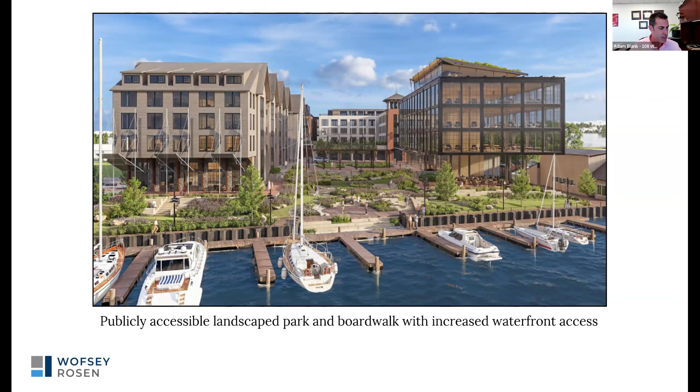And again, as I know you've done lots of these, I just want to take maybe 2 or 3 minutes quickly running through. Obviously, the purpose of us being here tonight is asking for you to hopefully make a determination for consistency with the harbor management plan. I'll show you really quick—we do believe it's consistent with the harbor management plan.

We are including a water dependent use, and we have agreed with the planning and zoning staff that we will make sure it's clear in the labeling that it will be what you sometimes refer to as truly a water dependent use versus not such a water dependent use, but classified as a water dependent use for a portion of the site.

That's in addition to the new boat slips, in addition to the improvement in water quality based on the improvements you'll hear from Vince Hines in just a minute. We're creating public access to the waterfront, and we're promoting sustainable economic growth on an underutilized site and enhancing public appreciation for Norwalk's coastal resources. Those are all in your management plan. And again, maintain and enhance opportunities for recreational boating and boating related uses—we're going to be creating that with the boat slips.

Opportunities for non-boating recreational use of the harbor and the waterfront, right in the plan: walking, bicycling, picnicking, nature observation, land-based fishing, enjoyment of water views, and special public events on the waterfront sites. I think we're going to accomplish all of that with this application.

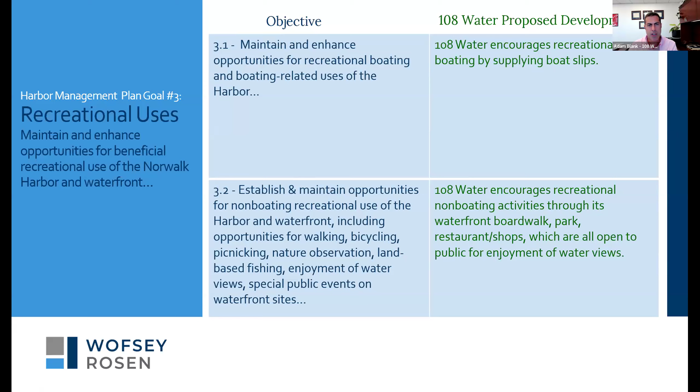We're committed to a truly water dependent use on a portion of the site that Seelan will show. Your plan asks for supporting continuing operation of non-boating water dependent facilities and areas, including waterfront, park, and beach areas, which we're creating. You'll hear the boardwalk we're proposing includes a grand staircase so the public can walk down directly and touch the water.

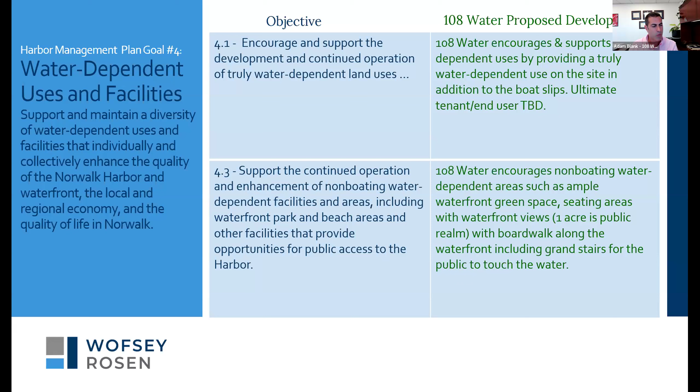Impacts of flooding and erosion control - I'm not the expert on that, but you'll hear that compared to what's there now, we're going to make it significantly better. We're not going to solve all the issues on Water Street, but we think we can make some improvements, and you'll hear about that.

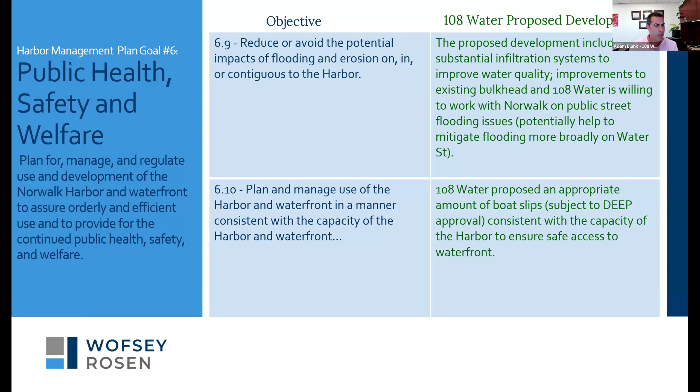Again, plan and manage use of the harbor and waterfront consistent with the capacity of the harbor and waterfront. We want to put in as many boat slips as will be permitted through DEEP. We're promoting substantial economic growth and community development. Some of the boat slips will be available for transient boaters, restaurant, public use, and some will be reserved. We think with this site we're going to really encourage economic activity, recreational and tourism.

Again, we're improving existing conditions. There's no existing water access areas for public use - we're creating that. We're creating new water access areas for public enjoyment of the harbor, and with the public realm and green space, we think we can hold some harbor related events and provide recreational opportunities there at the site. None of that exists currently.

So we believe - and I don't expect you to agree with me at this point because you haven't heard from the rest of the team yet - but I'm hoping that by the end of the presentations you'll think back to those items we've listed and find that we are in fact compliant, or consistent, with the harbor management plan.

With that introduction, absent an immediate question for me, I'd like to turn it over to the architect, Seelan Pather.

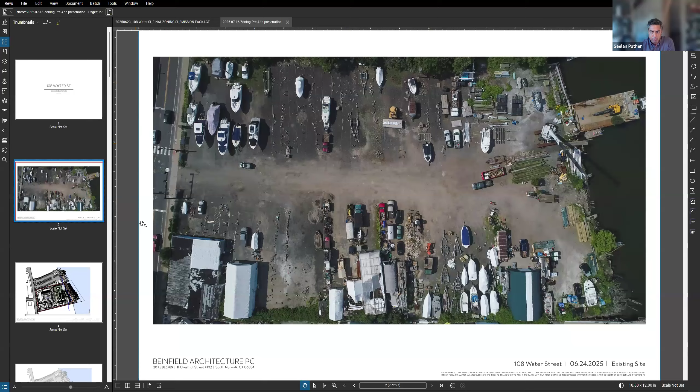I know you probably want to hear more about the site from Vince than me, but I'll go over the big picture concepts we tried to achieve here. Start with this - this is the site, what Adam brought up before. One of the things that struck us when we wanted to create this truly mixed-use development is that we wanted to create a permeability through the site that doesn't exist today. It's very much private now.

Here's our site plan, and this is what we're calling our connectivity plan. It's a truly mixed-use development - it's got residential, 59 residential units, 2 office buildings here and here, you'll see it more in detail when I go through it. It's going to have a restaurant, retail type uses at the front on Water Street, and then this water dependent use that we've been speaking about.

From the beginning we worked with the developer to create the idea that the site was permeable, that people could use the waterfront side of it so that it actually activated the entire site. That was a fundamental concept from the beginning - that we had to activate the site from the street to the water for it to be a successful development.

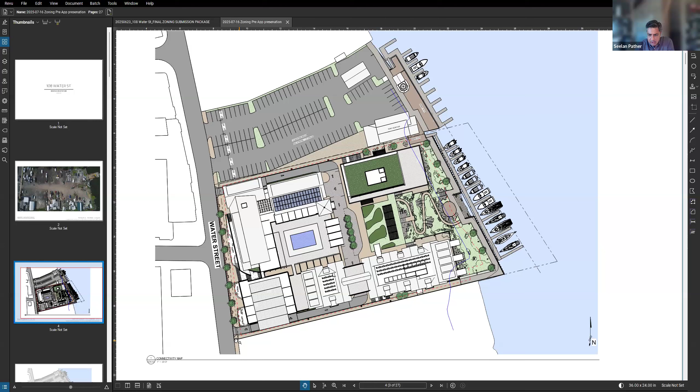So with that, the 2 edges of the site have walkways going all the way from Water Street to the water. Now these are flat - you'll see in the renderings that the actual development will take you up above the flood elevation and then back down to the water, but these 2 edges are flat. So walking along Water Street, you can literally turn right, or turn left if walking this way, and walk on a flat surface to get to the water.

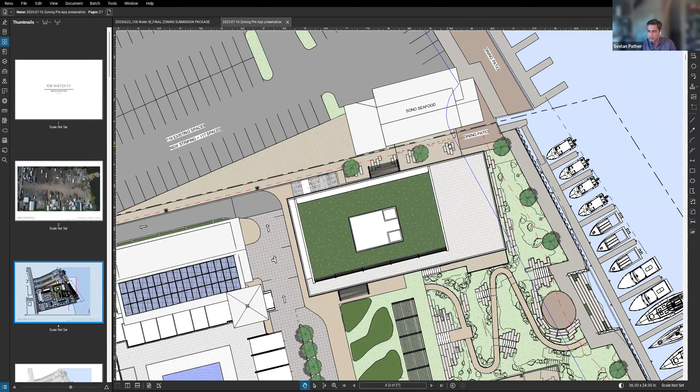When you get to the edge, this is a boardwalk consistent with the city's goal of having a connected boardwalk. We're doing our part, we think. We're creating a boardwalk that fronts our entire site and hopefully connects in front of the Sono Seafood restaurant right here, and we're still working on that. What this diagram also shows is this opportunity to widen the path if we can figure that out with this adjacent site, and really have a curated edge here that people could sit along and have different experiences as they get to the water. So that's the two edges.

I'm going to jump ahead here, I'll come back. That's the two edges. But what we see as our grand gesture is this grand set of stairs that come off Water Street here, invite you into the site. Again, anyone, it's a public space, through the site, up, over, and to a raised platform, if you will. I'll show you that better in the renderings.

And again, all accessible by the public. You go into the two office buildings if you work there. It's ADA accessible, and there's an ADA route via an elevator here. Then you can go to the leasing. This is the heart of the project. You go to the leasing offices or to the residential in this area. But someone from the public can literally come up here, come up to this area, and then walk down by the serpentine route to the water. So all of this, we hope, is a very pleasant experience for pedestrians coming up through the site and down to the water.

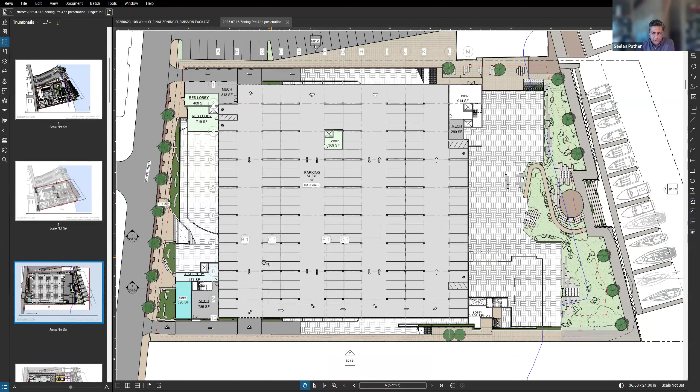Go back. So just to explain, there's a series of two parking garages at two levels. There's two lobbies here that meet the street at street level. You know that's in the flood, that's where the whole of Water Street meets. You have to enter at below flood elevation, but these two lobbies take you up above the flood elevation. There's parking at elevation 9, and then you get to these levels that are above flood at 14, two above flood by regulation. We are outside the VE zone, that's that blue line here for all of our building, and so we're above the flood elevation of 12.

And once you get above that lower level, you have a higher level with a residential amenity, one level higher than this roof deck here, and I'll show you that in the renderings. So all in all, a series of elevations with a series of different amenities for different users on the site.

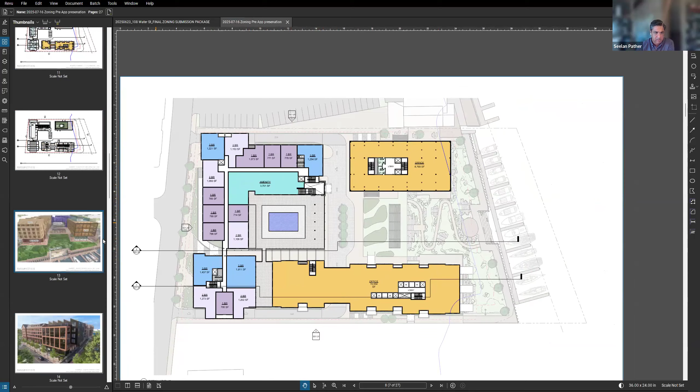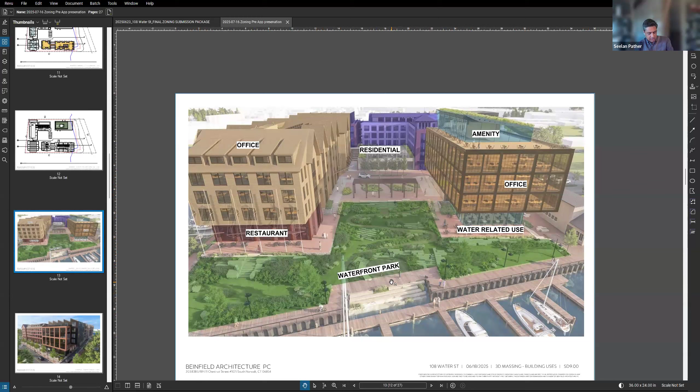I'm going to jump straight to the renderings, unless you want to go to the plans. I'll go through anything you want. But this diagram essentially shows residential at the back. Here's Water Street behind the purple. Here's your boardwalk in the front. Here's your office, here's your office here, and here's this entirely public—I don't want to say park, but landscape area—that you go up from elevation 18 all the way down to about elevation 7 at the water.

This is what it looks like from Water Street. Here's your grand stair entry here, here's your flat walkway on either side, here's that walkway coming down all around, here's that boardwalk going across, with the aspirational goal to connect this to the Sono Seafood and beyond, hopefully at some point.

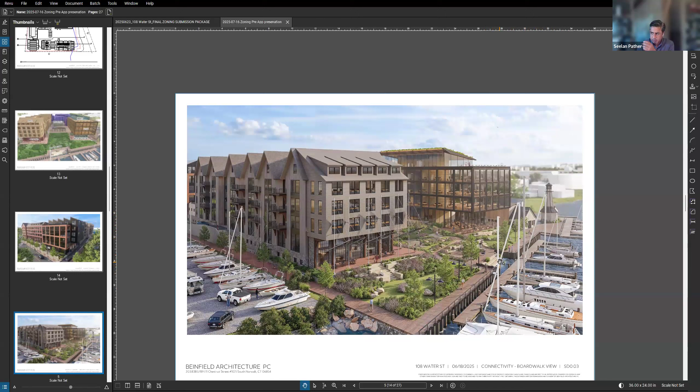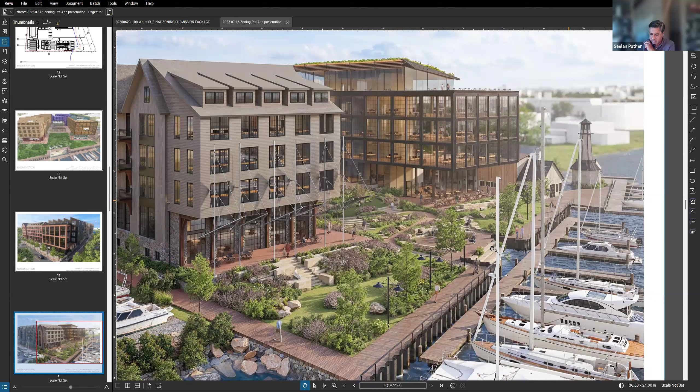It's one of the few places that you can actually touch the water in Norwalk. I walk down to Oyster Shell Park most days, and there's one location outside the Maritime Aquarium, and another one at the actual park, and this will be another one where you can come down from a high elevation from a restaurant here, and there's a water-dependent use right here. It has pride of place in front of the docks, and you can sit here or sit down here and touch the water.

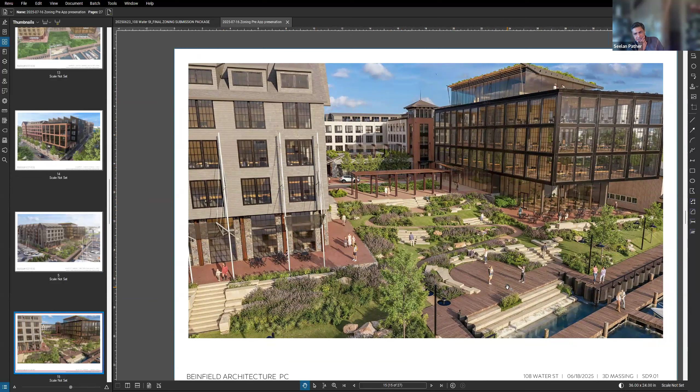And this is my favorite image, showing the type of place we're trying to create. Really, we have two office uses, a residential use that spills out, a restaurant use that spills out, and a water-dependent use that spills out. We should hopefully create one of the better public spaces in Norwalk, if we get it right, and we intend to.

This shows how the site gently slopes up to the high elevations at the back, and then, like I said, there's stairs that take you back down to Water Street on the other side of this. And Adam, I think that's enough for the flavor of it, no? Unless you want me to get into anything else.

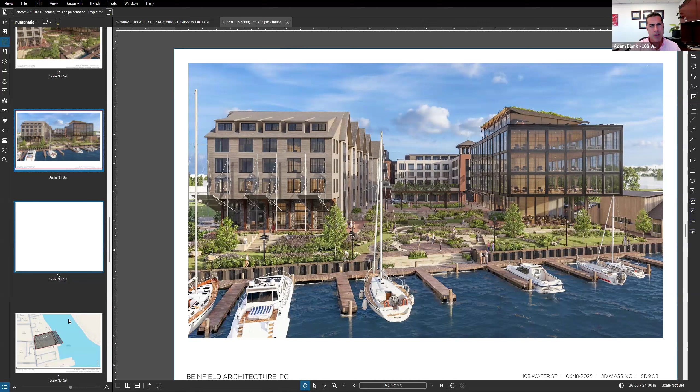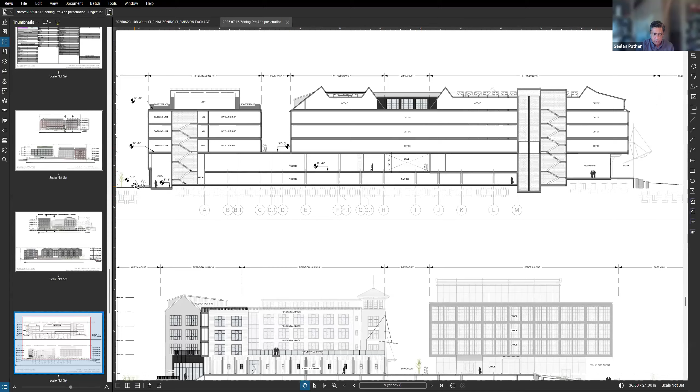I think that works. Just to point out that parking at the lowest level is above street level, so we're not going down, we're going up, even at the lowest level of the parking. Here's the grade of Water Street, here's the water, and you can see we're not going down below those elevations. Everything is built up, so we're going up and over and back down.

Is that above? Adam, okay, we have a raised hand here. Owen's got his hand raised. I just want to make a comment about the piece of property, if that's okay. Yes.

So I've seen a lot of things, and I've seen a lot of renderings, and I've also seen what is transpiring in the news. Unfortunately, for us, that piece of property is the most harbor-dependent piece of property for the city of Norwalk. Not only does it supply us with our fireworks, but it supplies everyone who lives out on our islands a way to get their hazardous material, i.e. gas, out to their pieces of property. And also for us, not just for the Harbor Commission, but for the law enforcement side, it pretty much takes care of all of our destroyed, abandoned, derelict vessels and the largest marine construction that we currently have. And I just wanted to make note of that.

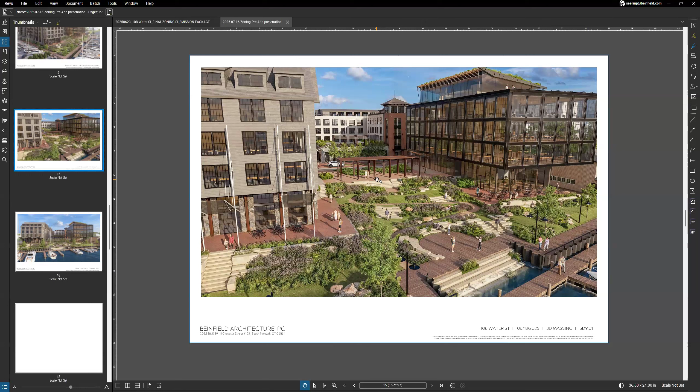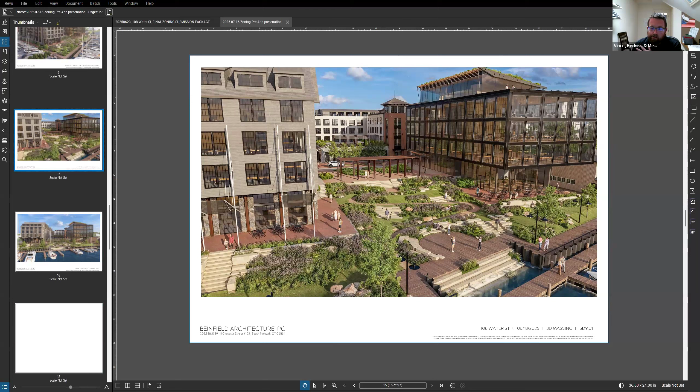Vince? Certainly. Good evening. For the record, Vincent Hynes, licensed engineer with Redniss and Mead, having offices in Stamford and Wilton. Our office has provided the engineering and surveying services for the project. And so if there's any site-specific comments, I'd be happy to respond, but I'll start with a short overview. Let me share my screen. Seelan, can you unshare? Trying to, Vince, sorry. There you go.

All right, so hopefully you can see my screen. I just have the existing condition survey up, as Adam indicated. 2.7 acres about, as measured to mean high water, and the site lies on the western shorefront of the harbor. Site's currently developed with a mix of single-story buildings and at-grade parking consisting of both paved and compacted gravel surfaces. There's no notable green area on the site and no formal drainage systems in place to our knowledge. There are two site drainage basins, portions of the site sheet flowing directly towards the harbor, and portions of the site towards the Water Street right of way, where it is captured via city drainage infrastructure and eventually piped out to the harbor via drainage easement at 120 Water Street.

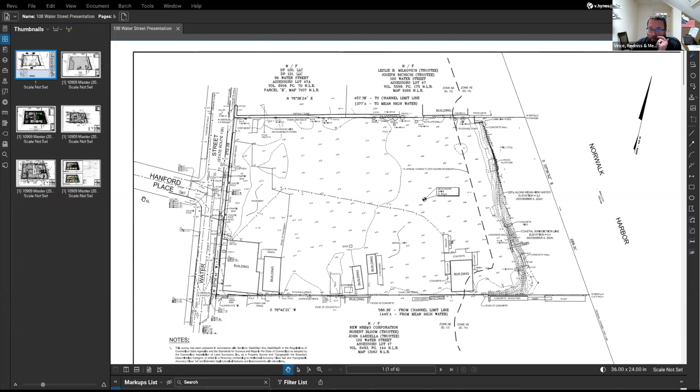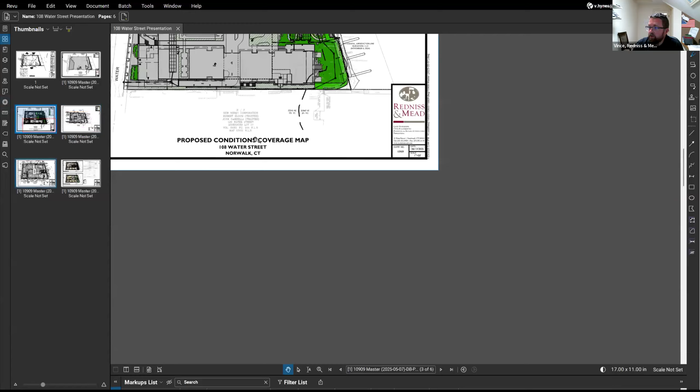And I'll just quickly share this coverage exhibit, kind of depicting the hardscape and compacted gravel and dirt surfaces, and then skip ahead to the proposed plan here. Proposed site design includes city standard items such as streetscape elements in the form of trees, lighting, and sidewalks, as well as on-site drainage improvements to meet the requirements of both zoning regulations and the city drainage manual. As indicated by others, Seelan and Adam, there will be publicly accessible walkways available both along the north and south portions of the site that provide that ADA access out towards the boardwalk. This proposal, if you look back at that coverage exhibit and then compare it to this proposed coverage exhibit, includes a decrease of coverage of approximately 12,000 square feet, which includes landscape zones and permeable walking surfaces within those public realm areas.

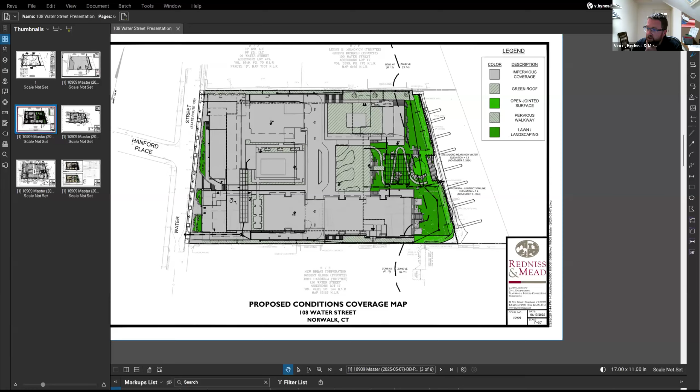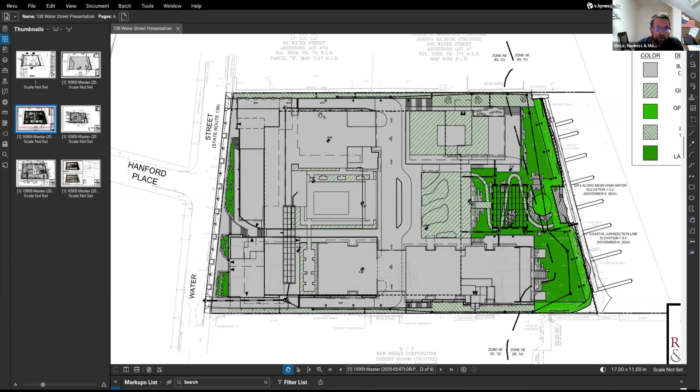Although counted as impervious coverage, additional benefits are achieved on the roof area with green roof, about 11,650 square feet of green roof area, which again provides water quality via implementation of planting trays and soil for the direct runoff there. In addition to the decrease in overall impervious coverage, there are two underground infiltration systems proposed, which provide water quality and peak rate of runoff attenuation. The first system is below the lower level of the garage, highlighting that here on the screen. The tributary area of that consists of kind of the front half of the building roof area and the driveway ramps on either side of the building. This system will have an overflow set above the water quality volume and will be piped to the infrastructure within Water Street. And the total tributary flow to that city drainage system is decreased with this proposal.

Vince, how high is that above the floodplain, the areas in there? So the garage itself is at elevation 9. Oh, okay. And the proposed infiltration system is set above primarily elevation 4.

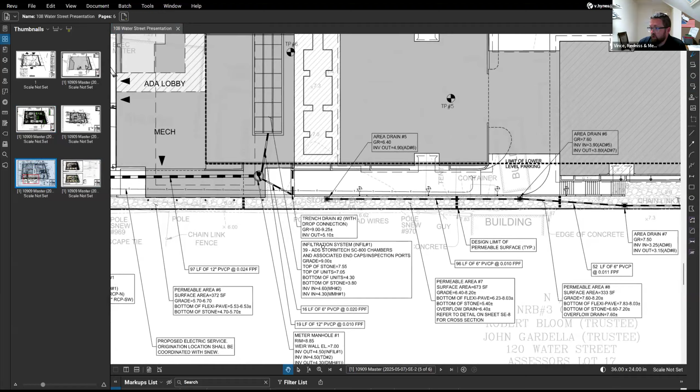So we set that system commensurate, sitting above mean high water. That second system is located underneath the public landscaped area on the water side of the site.

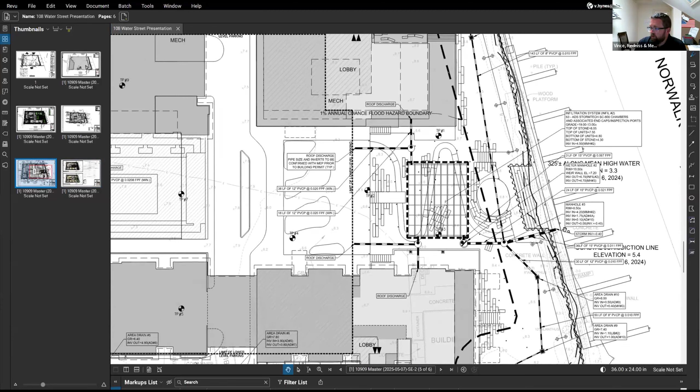Similarly, overflow is set to provide that water quality volume, and a new pipe is proposed to discharge out into the harbor, collecting overflows from the permeable walking surfaces and from that infiltration system.

I didn't say what was tributary to this system. It's designed to capture and treat the runoff of the remainder of the building roof area.

In this case, 70% of the impervious coverage on site is treated via the underground infiltration systems, while a total of 79% of the site area is treated when accounting for infiltration systems, permeable walking surfaces, and green roof area.

With the proposed systems in place, not only are we hitting that water quality value, but the total runoff flow and volume tributary to the harbor—considering what's going to Water Street and then back out to the harbor, but also our connection to the harbor—we're reducing that total flow and volume up to and including a 100-year storm event.

The proposed site plan also includes a sediment erosion control plan that will help provide guidance, both for erosion control and dust control, in order to minimize any potential impacts of construction activities.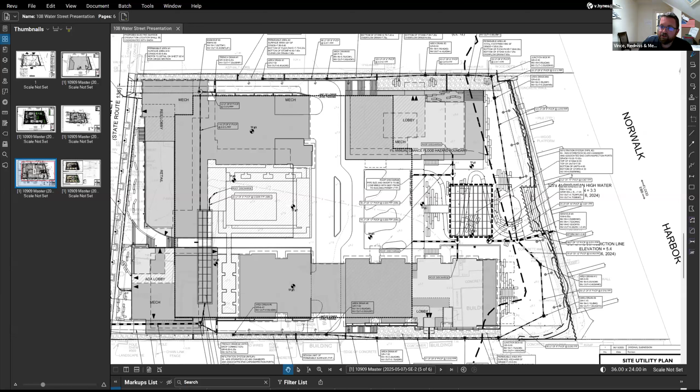Adam, unless you think there's anything else. I have a question about the lay of the land there. Is the bulkhead extending closer to the river than it is now? It just looks like I don't quite understand where the existing water ends and the parking lot begins.

Yeah, I think Azure Dee is on, but I think our goal is to keep it landward of the existing bulkhead. That's right, I could speak to that in a minute when you're all set. Thank you.

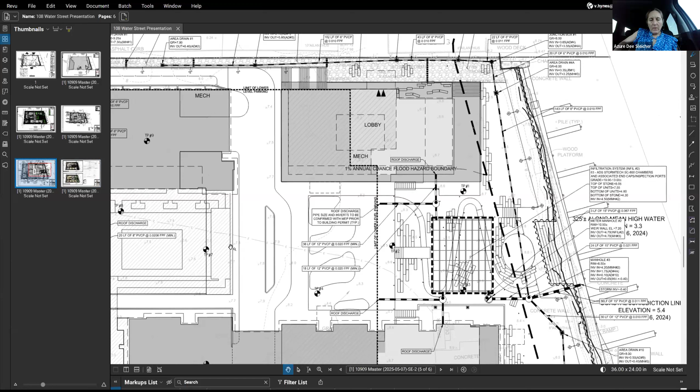Right, Azure? Yeah, great. Vince, if you could stop sharing, I'll pull up my plans. For the record, Azure Dee Sleicher with Race Coastal Engineering, PE, and we're focused on the waterfront aspects of the project, the docks and the bulkhead.

So to answer your question, we'll go to the existing plan. As you can see, it's highly irregular—there's a lot of structure out there, dilapidated timber, bulkhead, concrete structures, not necessarily a straight line. But we propose to strike a straight line, which would be just landward of what the average straight line would be today, connecting the dots between the structures.

This is something we're in the process of coordinating with DEEP on, as far as we know that we can't really encroach seaward of the CJL too much or encroach beyond the existing bulkhead line. So we're just inside of what we consider to be the bulkhead line, based on a highly irregular condition as far as what's out there today.

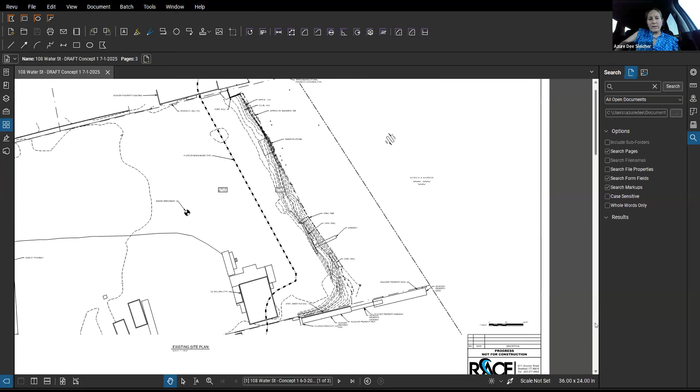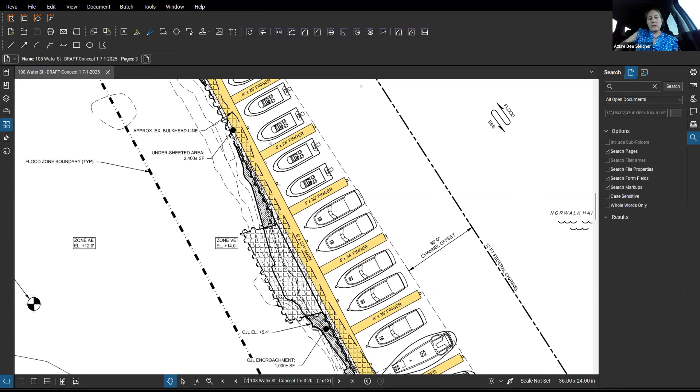So this is an overview of the actual sheet pile without the boardwalk shown on top, relative to where the CJL is now. We have a little bit of encroachment here and there, again because of the dilapidation of the shoreline, but based on striking the line of the existing bulkhead, we're just landward of that.

If I go to this other rendering—I want to start by saying that right now you're seeing this application as part of the coastal site plan review process. You will be seeing it again when we submit to DEEP. As Adam mentioned early on, we're in the process of coordinating with DEEP, and all of the waterfront work is subject to DEEP's final review and approval. We're in preliminary discussions with them right now on the design aspects of this project.

We plan to submit a pre-application review request to your commission, probably within the next 4 to 6 weeks. So we expect that we will be before you again in the capacity of the permit application for DEEP.

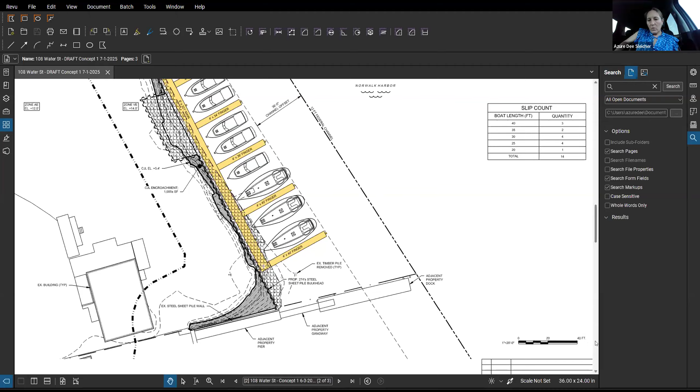So one more here. Just get there. There we go.

This shows the overview of the proposed docks. We are fairly limited in space. We have the Federal Navigation Channel nearby, and we've maintained a 36-foot regulatory offset for any fixed structures, which leaves us the area where we've placed the docks. We've attempted to maximize the number of docks and the configuration to meet within the channel setback line, and we've allocated a range of potential slip sizes from 20 feet to 40 feet over a course of 14 floats, or 14 spaces, that would not require any dredging.

That's one key aspect—we're not anticipating needing to dredge. We've done some initial site work, hydrographic survey work, and so forth, and determined that we can fit these particular floats with this configuration without the need for dredging. The docks will be ADA accessible, so we looked to site the gangway to make the docks accessible as well. And as mentioned previously, we have the boardwalk and the bulkhead underneath. That's pretty much it, unless there are any questions.

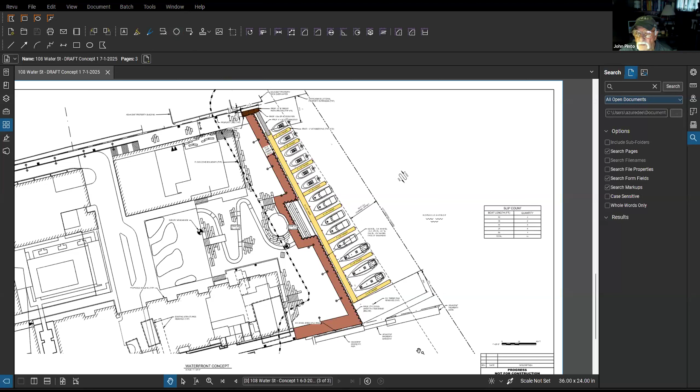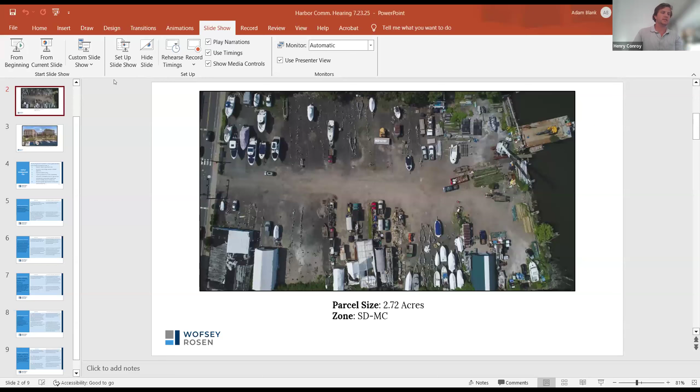I guess the only question I had was, you mentioned there's access via boat for the restaurants. Is there going to be some transient slips amongst those, or are those all just owner occupancy for the residents? We plan to have a combination of transient slips for the restaurant. Just because they're open doesn't mean they're completely designated for the restaurant. We want to have some additional amenity to the public boaters to be able to get to the site and enjoy the park as well.

I'll just want to go back to something I think Officer Lee said, just to put it out there because it is out there: the current site, somewhere between 85 and 90% of the current site, is boat storage, where boats are hauled here from off-site. They're not pulled out of the water here.

So that's the bulk of what the site is currently being used for. I know Henry and the team have been working with the existing users to try to find a place to relocate them. Obviously there are some trade-offs if this site changes over. We are going to lose the existing users, but in exchange we'll have this essentially public access acre of park, which doesn't exist, the boat slips, the redone bulkhead, and we've committed to a truly water-dependent use with the user to be determined on that front chunk of the site reserved for that use.

So you can't have everything on every parcel, but we would like to think that this is overall an improvement, even though there are certainly going to be some losses.

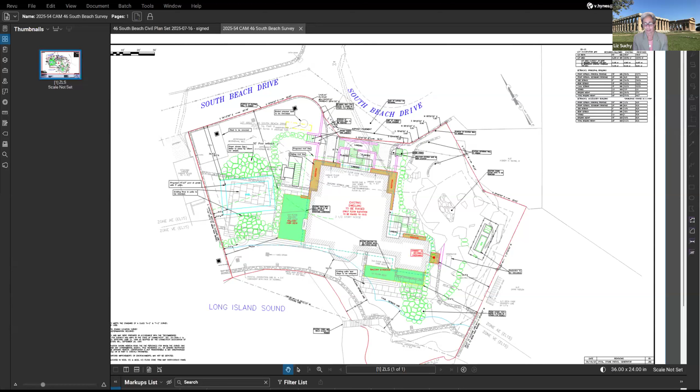Variances were granted by the Zoning Board of Appeals last month in connection with having to elevate the structure. There were some variances we needed, and those were approved. There was also a coastal area management site plan application filed in connection with that variance application, and I believe your staff, Ms. William, opined as to the consistency of this proposal with the Coastal Area Management Act. That is it in a nutshell. We're happy to answer questions, and if you'd like Mr. Hines to walk you through the site plan, we're happy to show you anything about stormwater management. It really is taking the house in place, moving it up to meet flood, and making some additional changes to the dwelling and the site itself.

As you know, the commission is usually interested in impervious surface, and also water runoff, catching water runoff, for example any Cultec system planned to minimize inflow into the harbor. I was hoping that could be addressed.

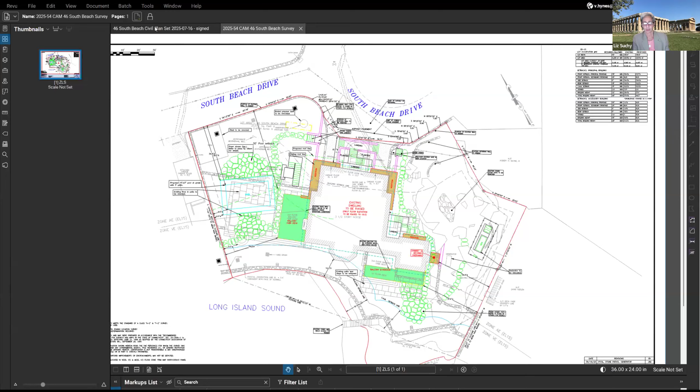Mr. Hines, would you be kind enough to address those points and any other points appropriate from a coastal area management and harbor management perspective? Yeah, absolutely. Vince Hines, Redniss and Mead, licensed engineer in the State of Connecticut. We provided the site engineering for this project. The site, as Liz indicated, is just under a half an acre with about 8,900 square feet of impervious coverage, inclusive of building, driveways, miscellaneous walks, and ledge.

The stormwater facilities on site include area drains that discharge both towards South Beach Drive via weep holes in the front existing wall, and existing drains on the water side that are connected and piped out again through the seawall towards the sound.

With that, there's no formal water quality infrastructure other than sumps within the area drains. Ultimately, as I indicated last month for the 38 South Beach Drive job, the infrastructure within South Beach Drive is tributary to the sound as well.

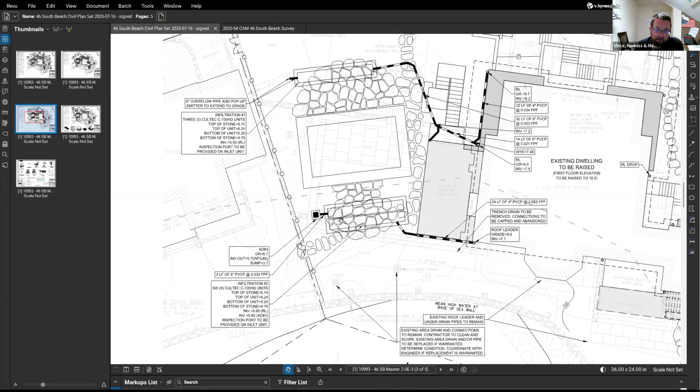And then that overflow is eventually tributary to the same discharges that exist today, whether to the Sound or to South Beach Drive. As Liz indicated, there's no work seaward of the bulkhead wall here, a seawall. It's all proposed landward of that wall. And the plan set also includes a series of sediment and erosion controls with that guidance for both erosion control, dust control, and any tree protection, just to minimize any potential impacts for construction activities.

So the overall project will minimize or roughly decrease the amount of water runoff into the harbor through this Cultec treatment system. And obviously then the need to maintain best management practices during the construction process, so that any debris or runoff would be prevented from going into the harbor.

One other thing, that shed that exists right on South Beach Drive is going to be eliminated in its entirety. So not only does it remove a non-conforming structure, it also opens up a view vista from South Beach to the water, and also removes all the impervious surface roof that exists today in connection with that corner structure. It's just a shed, but that's coming down as well.

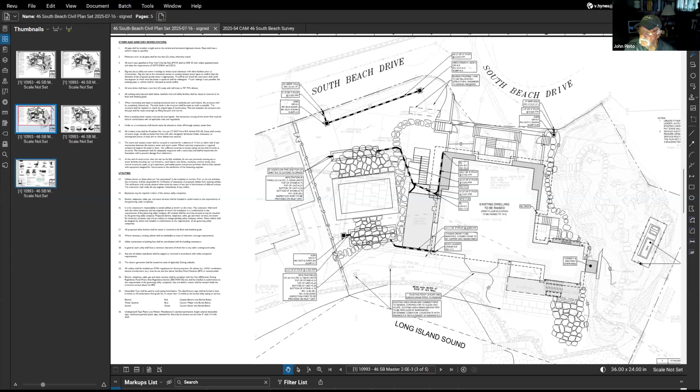Yes. So one thing is the DPW manual, and the way DPW interprets their manual is that you need to meet or reduce both flows and volumes of runoff up to the 100-year event. So we're doing that in essence with the net neutral impervious coverage, but also then increasing the amount of available water quality treatment via the two Cultec systems.

And then I think it would be consistent with the harbor management plan with respect to two topics: one, the improvement in water quality and stormwater conditions, but also reducing the vulnerability of an existing dwelling to flood hazards. So those are two aspects of this that the commission could consider as consistent with the harbor management plan. Yeah, those were two points that certainly have been major issues that we've presented with in the past, and the same with the neighboring property as well.

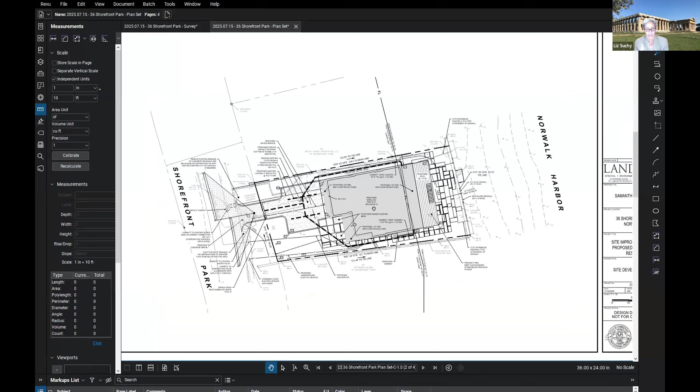The coastal site plan application was filed July 16th. The property is at 36 Shorefront Park, District 2, Block 85, Lot 21. The property is just under 6,500 square feet, and it is in the CD1S zone, which was formerly the B residence zone, City of Norwalk. It is adjacent to Norwalk Harbor, directly to the east, so it is clearly within the coastal area management zone.

It is split AE and VE zone. The VE zone is elevation 14, AE elevation 11, but since the structure is proposed within the VE zone, it must be built to VE zone standards. That is a 14-foot elevation plus 2 feet as required by the City of Norwalk zoning regulations. So the finished floor, substructure, and ductwork will all be at least at 16 feet. In fact, it's a little bit taller than that.

Right now, the property is vacant. There had been a structure on it, which was demolished sometime in 2022-2023. There is an existing seawall, and like the prior application, there is no work proposed or changes to that seawall. This proposal contemplates a new single-family dwelling, 4-bedroom, fully compliant with zoning requirements, fully compliant with FEMA and all of the requirements of the Public Works Department.

At this point, I would like Mr. Soumelidis to walk you through the site plan, and as you had asked before about stormwater management - between the stormwater management proposed and compliance with minimum flood requirements for FEMA, protection of life and property, I think that's both consistent with the harbor management plan. Mr. Soumelidis, it's all yours.

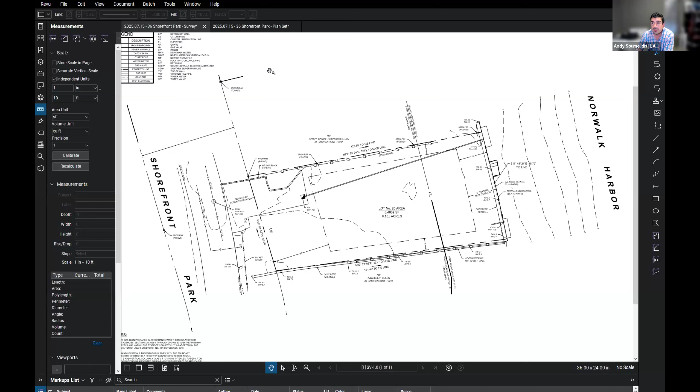Under proposed conditions with a new FEMA compliant structure, the first floor is up at elevation 18 plus, which allows ductwork and any horizontal structural members to be at least 2 feet above the base flood elevation of 14. What we did here from a stormwater perspective is use porous asphalt for the driveway, with open jointed walkways and patios, creating and promoting infiltration at the source. The roof runoff will be captured and piped into perforated pipes below that porous asphalt driveway.

Basically a big crushed stone with perforated pipe, promoting infiltration in the front yard here. The proposed impervious surfaces is about 2,200 square feet, a net reduction from what previously existed on the site a few years ago of roughly 700 square feet on this small lot. As mentioned earlier, there's no work waterward of the seawall or CJL.

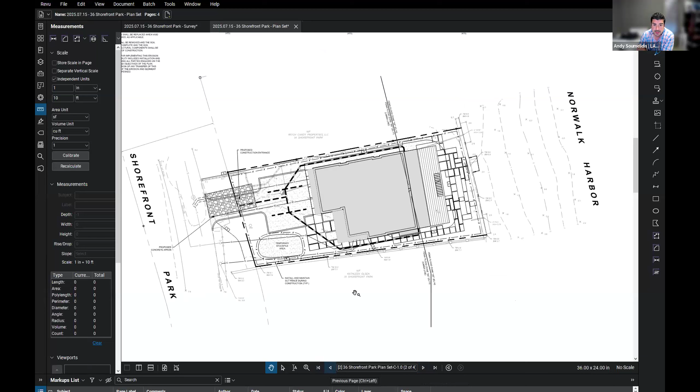All work is landward of that. Again, we promoted a lot of porous material here on the site for the driveway, walkways, and patios. We also have, as part of our plan, temporary erosion and sediment controls during construction - your typical silt fence and temporary stockpile located near the front of the property, away from Norwalk Harbor. Overall, we strongly feel this application improves water quality measures for the site, as well as temporary measures to ensure there's no migration of sediment during construction. I'm happy to answer any questions.

Any questions on the application for 36 Shorefront Park? All right, anyone like to make probably a similar recommendation as we had for the previous application?

Dr. Pinto, I'll make that with our standard language. So again, with the reduction of impervious surface and also the treatment of water runoff, and the usual comment with regard to best management practices during the construction process to avoid any debris heading into the Norwalk Harbor, we can certainly find this consistent with the harbor management plan. So Matt will make that statement.

Any second on that? I'll second that. All those in favor? Aye. Good. Any opposed? Any abstention? We're all set.

Well, again, Mr. Chairman and members of the commission, thank you for your time tonight, and we hope you have a shorter meeting next time around, but thank you for your time and appreciate your help. Thank you very much. Thank you all. Okay.

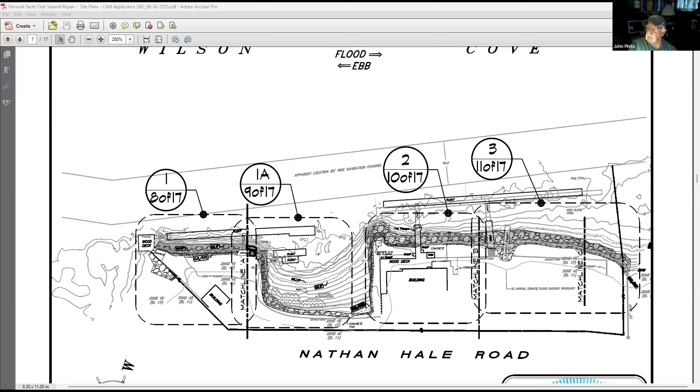I'll go ahead and make that motion that we find the application at 10 Nathan Hale Road, the repair and existing flood and erosion control structure of the seawall and deck, consistent with the Norwalk Harbor Management Plan.

I'll second that motion, John. All those in favor? Aye. Aye. Any abstentions? Any nays? No.

All right, we're all set on that. Tom, thank you very much, I'll get those letters out to you. Thank you for your time on this. And I'm also on the next one, so I'm just going to stay on.

This is at 32 Shorehaven Road, and again, it's to construct a residential dock. Is that correct? Yes, this is the same introduction as the last one, where you've seen this in the past due to the structures, dredging and fill permit application that was submitted, so you did a consultation form.

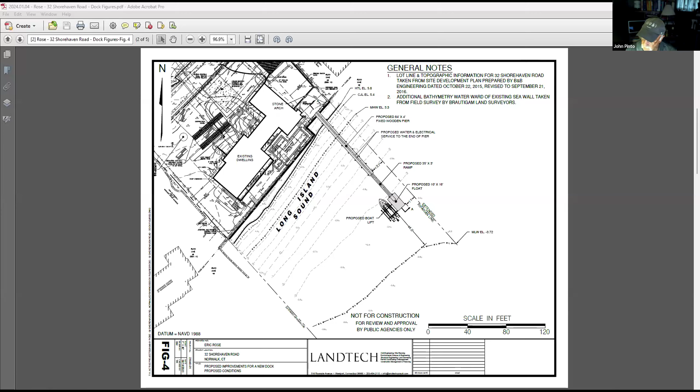You provided a consultation form on January 4th of last year. Since then, we have modified the plan. Actually, I thought I had that one up already.

The dock now dog legs toward the center of the property. I thought I was prepared, apparently not. But it is the same exact application except for the plan dog legs and goes to the center of the property. We have received a permit from the DEP, so we are now proceeding with a coastal site plan review application for the city, because a portion of the dock is within the city's jurisdiction.

And again, I can go into a whole bunch more detail, or whatever you prefer at this point. The reason for the dog leg change was to satisfy the neighbors to the north, who had asked for it to be pulled away. We did some simple design changes, and the applicants actually preferred it that way, so it was a simple change that satisfied both fronts.

Neighbors, everyone's in concurrence with that then? Yes, they were the ones who requested that it be further away, and we accommodated. It happened to be beneficial to the clients as well, so everybody was happy, which doesn't always happen, so I want to advertise that.

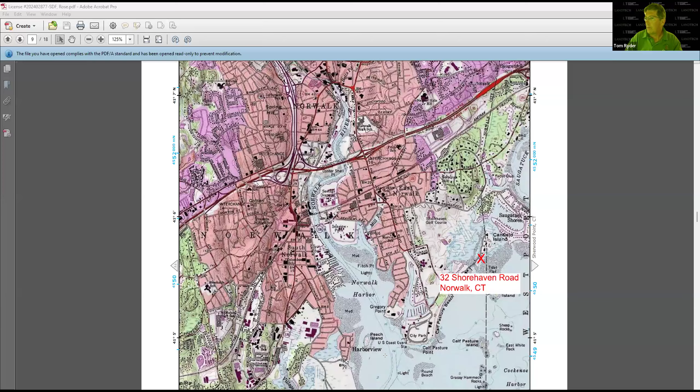All right, so I will share that. This is just showing where it's located, which we're all familiar with. Again, an aerial showing where we're familiar with. I will rotate this to accommodate. There we go, and rotate.

Right, so what we've done is kept this here and angled it outward, and we now have a 60.5 foot distance between us and the property line to the north. We have received DEP approval and Army Corps approval, so other than that, it's really just everything slid over to the center of the property.

So is that dock south facing? Yes, this is the north arrow up in the top left. Well, it's not really south, it's southeast. North is straight up, so this would be kind of facing southeast.

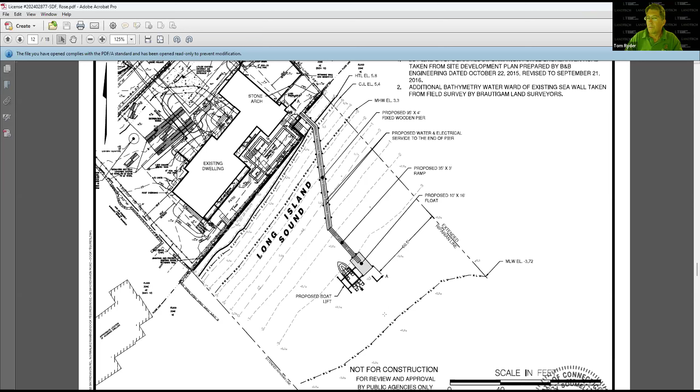So is that the second or third property on the island? I can't remember, well, I can go back and show you, there we go. That is the location of the property.

I guess the only question I have is, because of the way storms come in, it gets hammered from the east. Just for thought process about removal or storm prep, things like that, it gets pretty rough pretty quick in that space. Yes, and typically all ramps and floats are removed during the off season. This one would probably be a very good one to follow that suit for the reasons you just suggested.

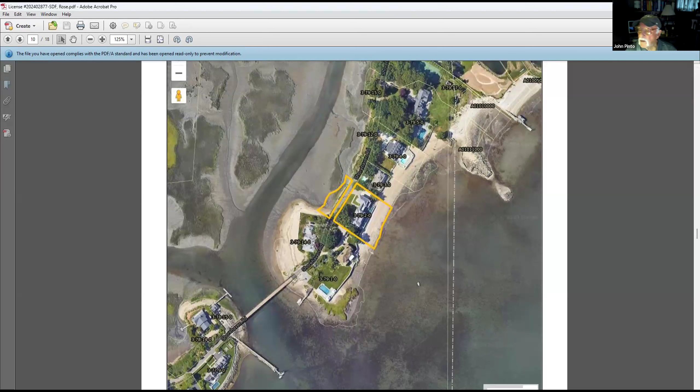Right, would anyone like to make a motion? Again, we find that consistent with the harbor management plan. I'll make that motion, Dr. Pinto. I'll second it. Thank you very much, with the standard language, but yeah, that's perfect.

Standard language, I don't have any issue with that, especially if we can just confirm that's definitely going to be taken out in the off season. My only concern is that it gets so dangerous in there quickly with an east wind, in a couple hours it builds to a couple feet.

That's great, okay, all right. All those in favor of the motion? Aye. Any abstentions? Any nays? So moved, and we'll move forward with that.